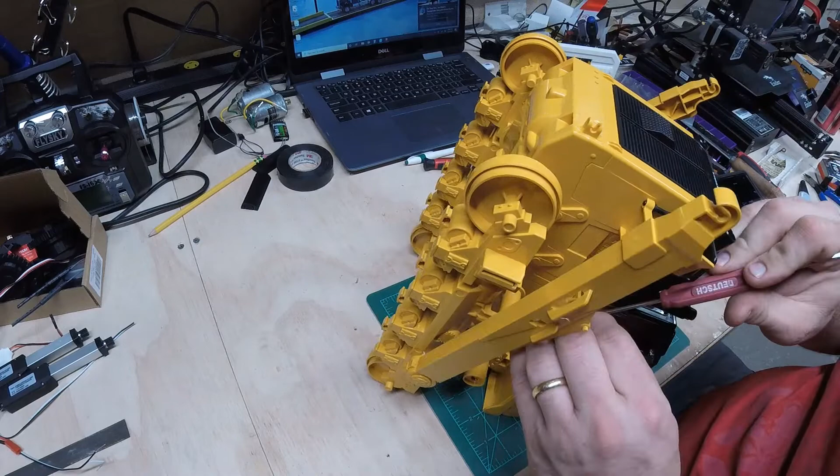We got a couple down here up front, kind of 2 right on the face here. And these are Phillips as well.

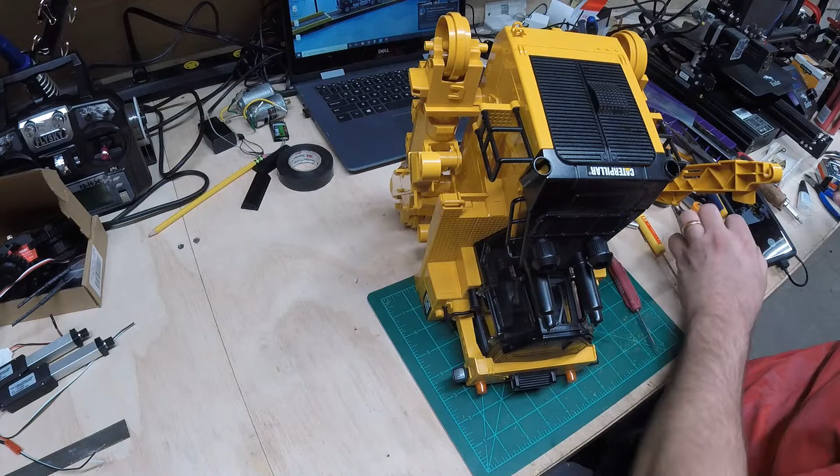Actually, I think I'm going to trim these up. So I just use them flush cuts and kind of trim off the face of them a little bit.

Oh, my front one's popped back in. Okay, just have these 2 left down in here, and this is where a little bit bigger screwdriver comes in handy. Just got to verify these. Oh, there we are.

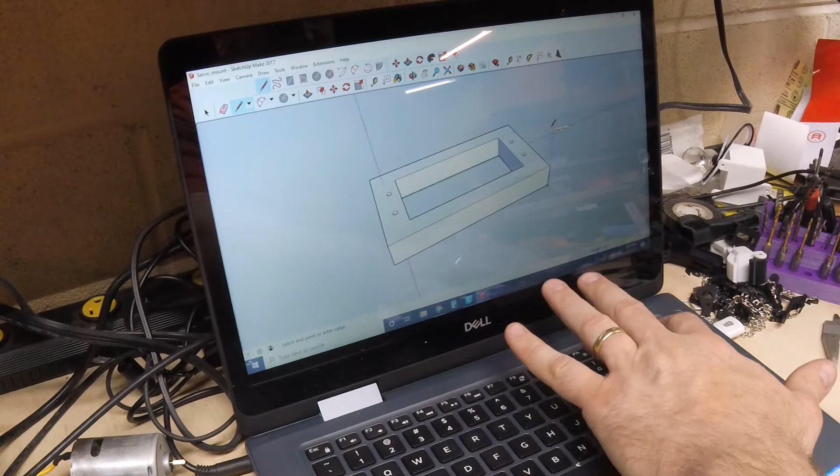It looks like the holes line up well, but I need to thicken this out to 0.415. So I'm just going to draw a new vertical line, and I can type in 0.415 on the blue axis, to bring this up to that point. I'll use the push-pull tool and bring it up to that point. Sometimes you've got to zoom in if it's not an even increment.

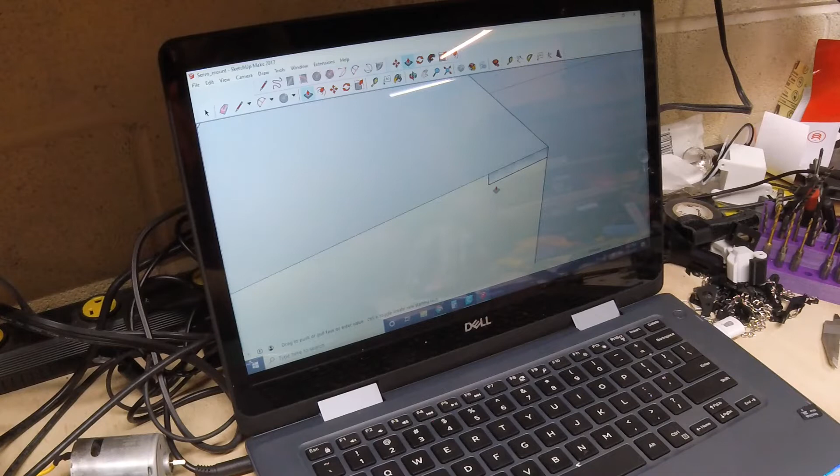That happens to me every now and again. I'll just kind of draw a face, and then pull this up to the edge of that face. There we go, now I've got the proper height.

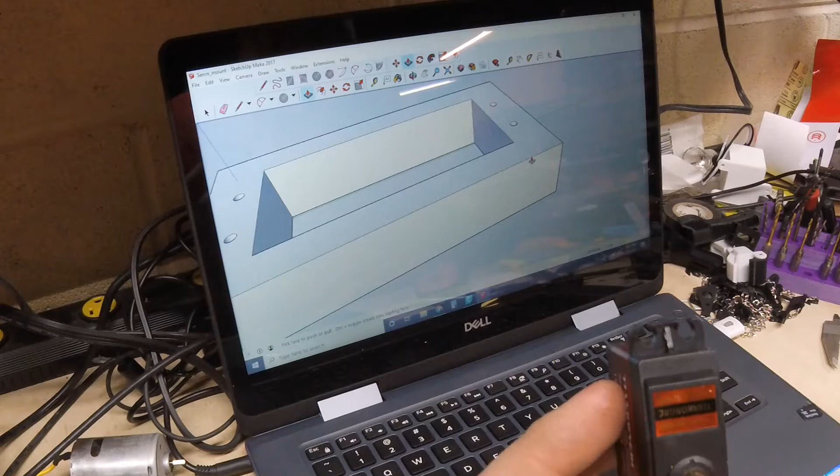One thing I noticed, this servo has a little gusset in there, you might say. So I'm actually going to just take that out of the file. Right, centered - oops, need to replace my battery again.

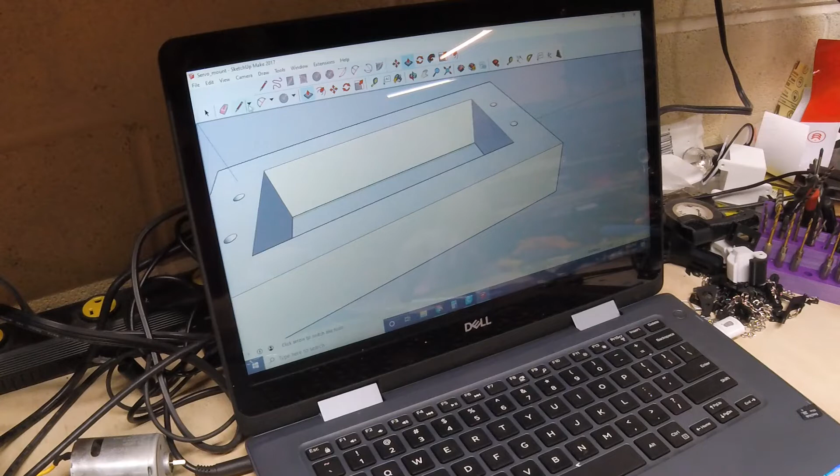We'll go for an eighth inch. I need to just open up an eighth inch area in here. I'll turn this around, snap a line from there to there, and come over a sixteenth and draw it in. Come over a sixteenth and draw it in, do the same over here.

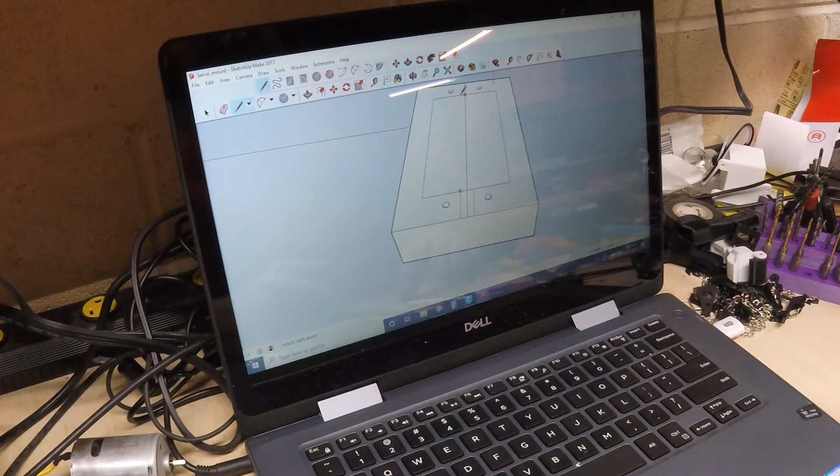I could get really fancy and put it on an angle, but honestly I just want a cavity for that to go. So get rid of that, get rid of that, and that. I'll delete that face out of here. And now it looks like this comes down.

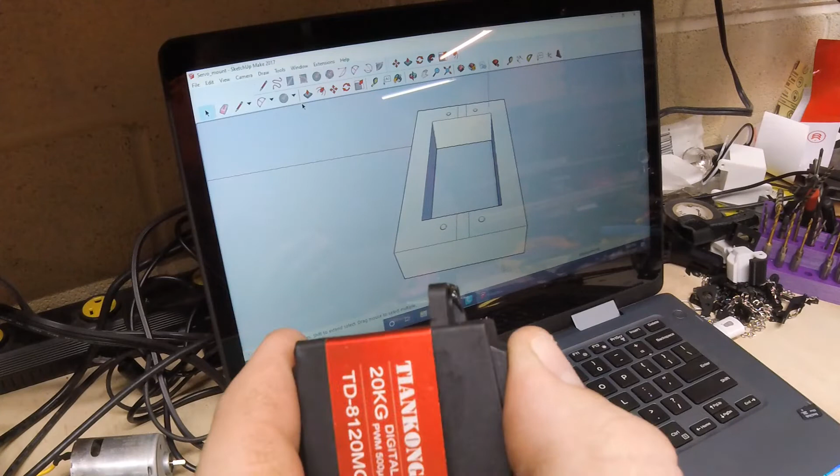I'm just going to round it out three-sixteenths, that'll be more than enough. So I'm just going to drop this down one, two, three-sixteenths. Actually, it came down an eighth. That looks good, just a little gap, so when that sits in there these gussets will fit in there.

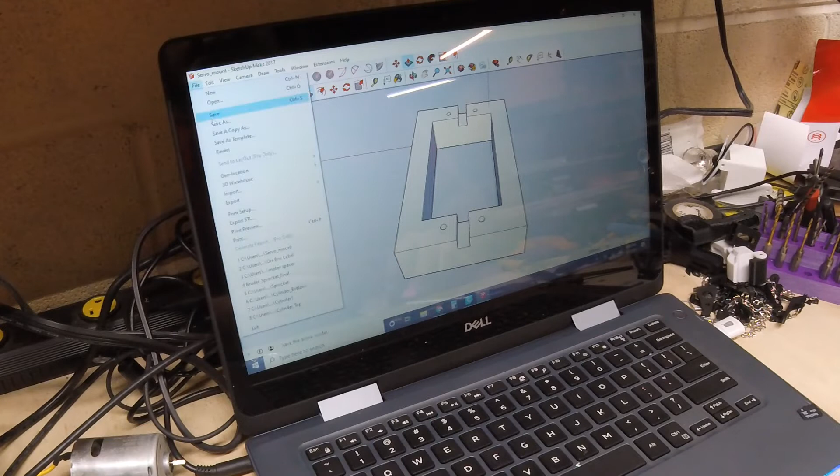So now I'm going to save this, save as, and I'll just call this servo mount. This was a TIANKONGRC, whatever that name is, that servo - I'll just name it as that. Hit save, and I'll export this as an STL file, export, and I'm going to go print this.

If you're not familiar with 3D printing, you need a slicer program. I use Cura. I was just printing some parts earlier, so I'm going to clear this out and load a new file. I'll load that new servo mount, and I'm going to make two of them, so I'll multiply this and hit slice.

I just saved them to a micro SD card. It's going to take about an hour and 45 minutes. I'll hit save, and now save this card, and we'll go start the 3D printer.

I'm going to take this GoPro over with us so you can kind of see - we're not going to do a time lapse on the printer. Tools out of the way. Sorry if I'm making you motion sick. Let's power this on here.

I'll pull my old SD card out from my last print and pop this new one in. Now I'll click initialize, print, servo mount, and there we go.

I got a black PLA filament, this is a 1.75 millimeter PLA filament. I love PLA - not the most durable thing in the world, but for hobby craft use it's been working great. Again, this is an Ender 3, got about 8.5 inches length, width, and height, so I can build some pretty cool stuff. One of these videos I'll show you all the kind of stuff I've made. But we'll come back in a couple hours and hopefully these will be done.